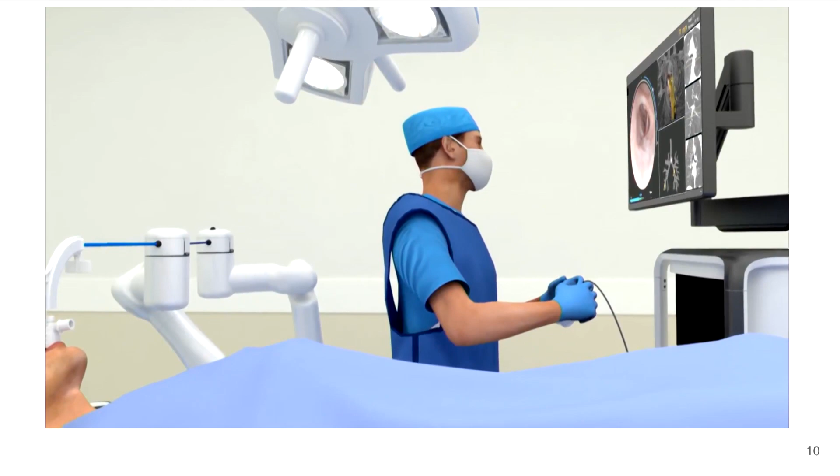We're here with Monarch, which is part of Ethicon and the Johnson & Johnson MedTech organization since 2019. Our product is the first and only multi-specialty flexible robotic platform that's cleared for use for both bronchoscopy and urology procedures. The platform integrates the latest advancements in endoscope innovation, instrumentation, controls, algorithms, and software, with the goal of enhancing physician capabilities and improving patient outcomes.

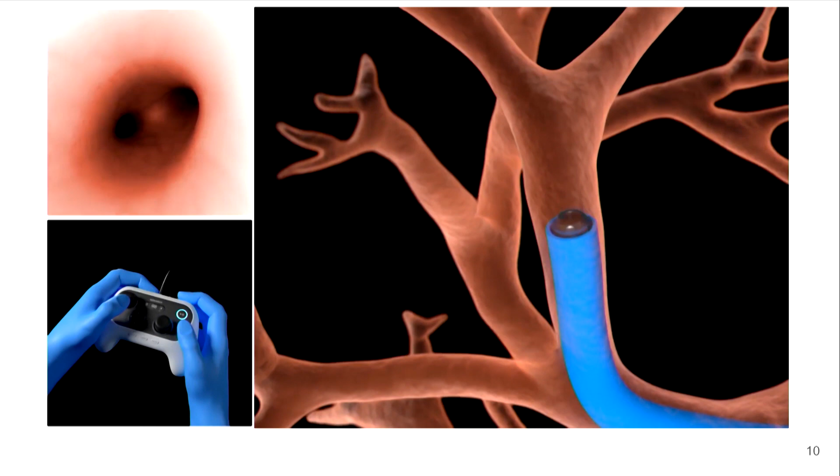To date, we've done more than 30,000 bronchoscopy procedures in the US, and last year we also received FDA clearance for our urology product, and we've been running clinical trials targeted at kidney stone management this year. So the goal is to extend the capabilities of the platform with an exciting pipeline of procedural innovation.

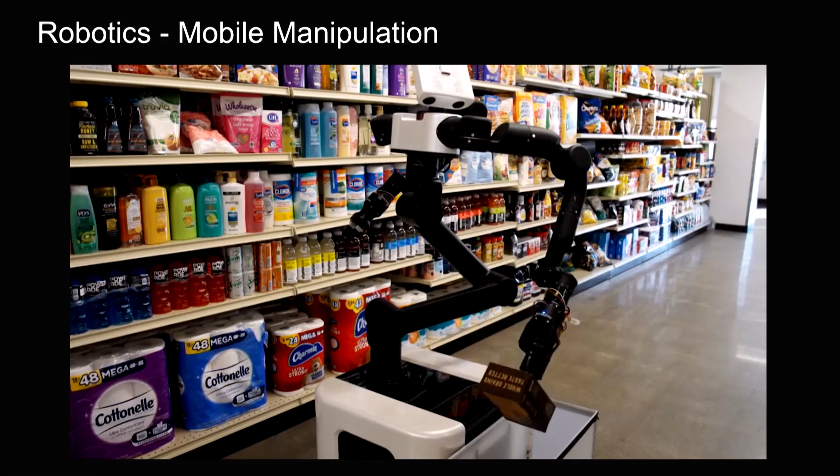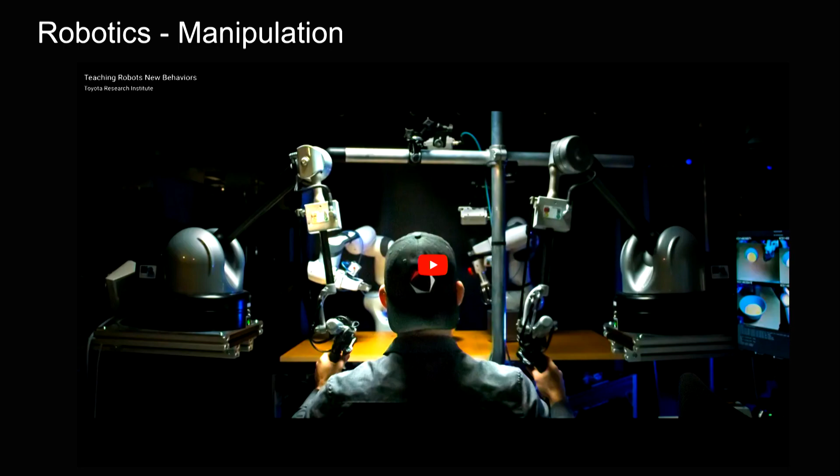and see how our capabilities enable these sorts of technologies. This is also transitioning into things like the factory as well, as we move toward some applications within Toyota. There's also a big manipulation effort in Boston, building lots of different low-level behaviors.

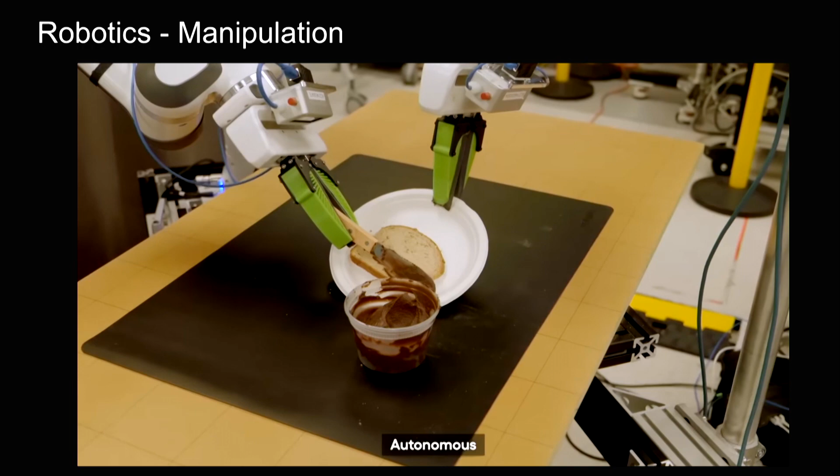We've actually seen a huge step change with some of the generative AI techniques, such as diffusion policy, and being able to train on 60, hundreds of different tasks. The promise of having large behavior models eventually is something that we're very interested in at Toyota, at TRI generally.

Beyond this, we actually have a large language model team to enable some of this downstream as well. We also do vision language models and a wide variety of principle-centric computer vision in the machine learning team.

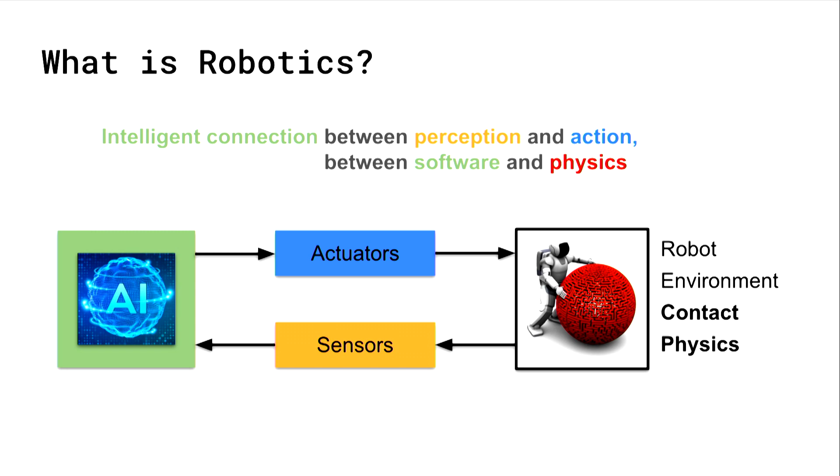Increasingly, all the sensor processing and control processing becomes more artificial intelligence and machine learning, and we try to build this into the system from the very beginning.

What's happening in the world of robotics? There's a couple of things which make things different. One thing is obviously generative AI, which we repeat again and again.

There's another thing which is increasingly important: building platforms that support all these different things. ROS was really one of the main platforms to get this going. Intrinsic tries to do something similar on a larger, more modern scale. The Open Robotics community, officially Open Source Robotics Corporation, is actually part of Intrinsic now, and we work together to make this work.

And then there's other cool things: a huge amount of compute power, TPUs becoming increasingly popular, and lots of different kinds of sensor modalities you can draw on. TPUs are kind of fun at Google.

Intrinsic is interesting because it gets into a large spectrum of applications, from basically more structured environments to increasingly more unstructured environments. We started a little bit conservative and try to get better.

We also have some fun interfaces. I can play this. You can see more about this, and this becomes increasingly more useful for research.

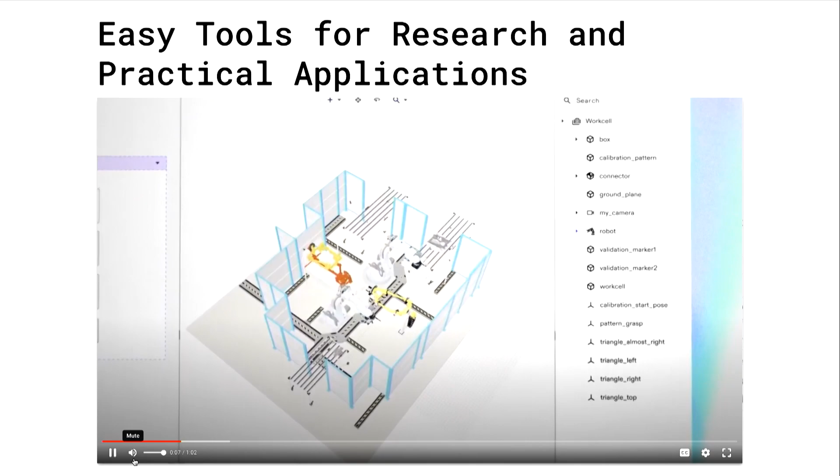That's pretty much it. You can find things on our webpage. We are always interested in collaborations and interns in the future. Thank you.

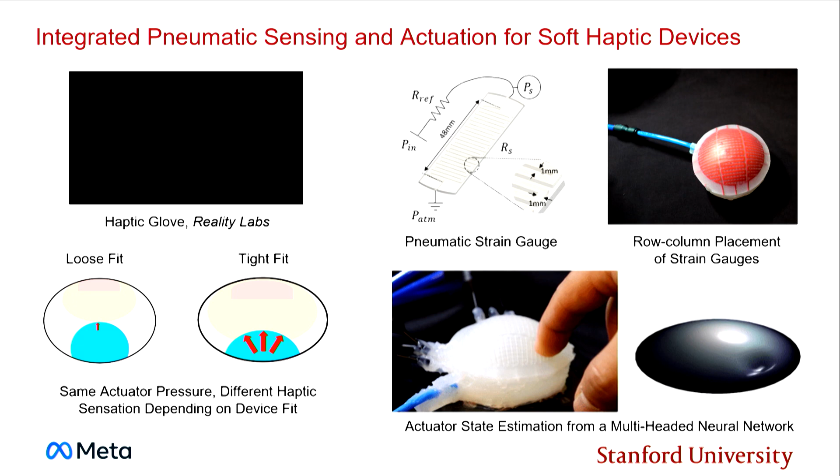One of the key problems for soft, pneumatic, wearable haptic devices is the difficulty of providing consistent haptic feedback due to variations in body shape and skin stiffness of users. Instead of internal pressure regulation, soft actuators should be controlled based on interaction force. We designed an integrated pneumatic sensor and actuator, a soft actuator capable of detecting contact force, contact location, and its overall shape. We do this by casting an array of pneumatic strain gauges on the surface of a soft actuator and estimating its states using a multi-headed neural network. For more information, please visit my poster.

Hi, my name is Morgan Masters, and the clock has started. Deep learning can accelerate field research, but struggles in novel deployments. This is because of a dependence on annotated training data, which is historically time-consuming and expensive to generate. Because of this, a lot of modern research gets stuck in the labeling bottleneck, where data cost precludes deep learning as a feasible tool.

In response, my team has built a tool called PinView, a field robotics system designed to help field research non-experts develop annotated image datasets for emergent research. We've been general in our design so that you could track disease on a farm field, inspect power lines, or census Arctic polar bears. Calibration is the primary challenge, and I'd love to talk about it at my poster.

Hi everyone, my name is Shuai Wu from Mechanical Engineering, Stanford University. Stroke is one of the leading causes of death in both the United States and worldwide. Considering the increasing number of aging people, this requires more experienced neurosurgeons, especially since these operations generally rely on navigation of a catheter in a very tortuous environment until you reach the target position.

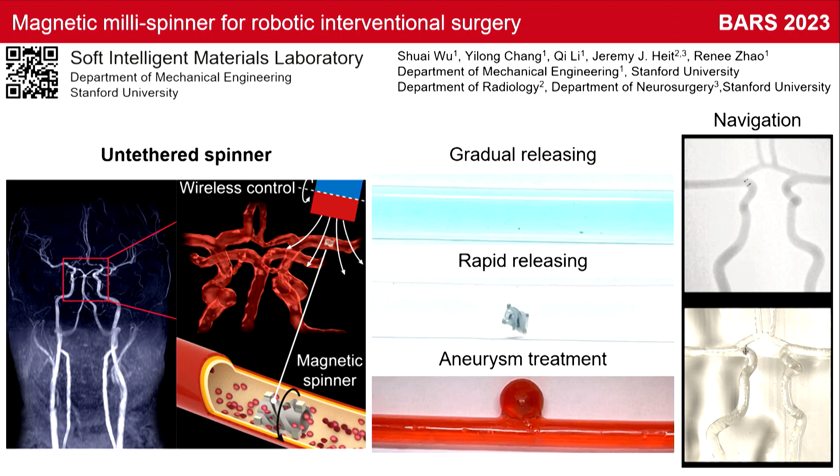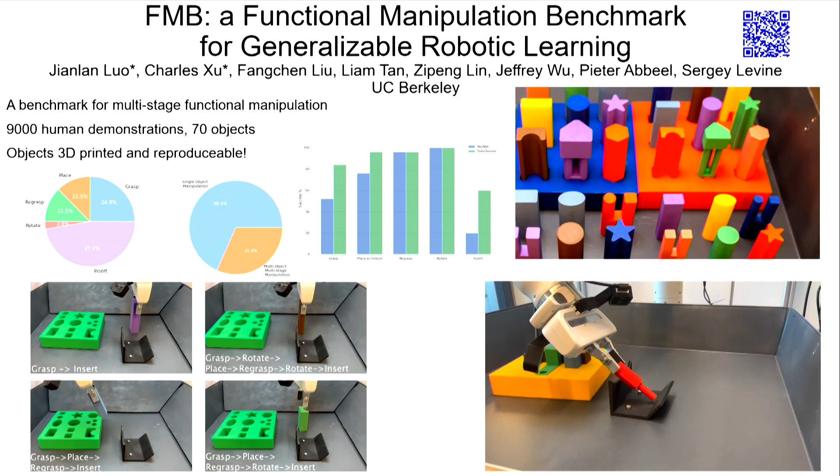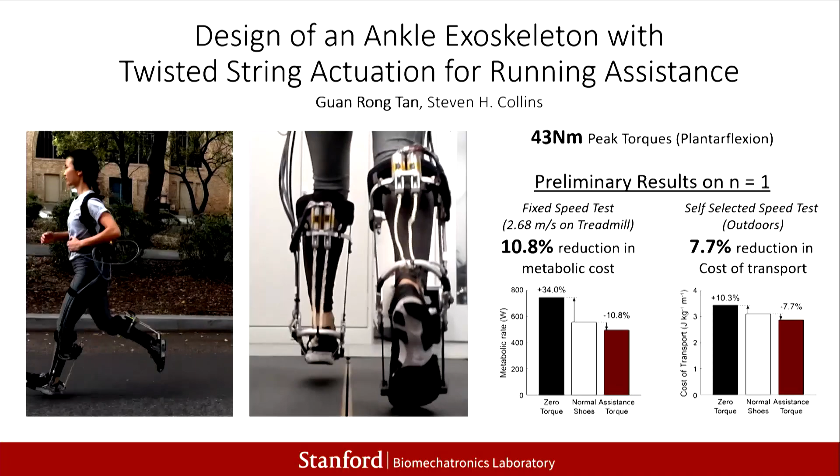We do that by applying plantar flexion torques at the ankle with twisted string actuators. You can see the twisted string actuators in slow-mo in the second video. Essentially what happens is that as the user's foot strikes the ground, the motors spin up the strings very quickly, causing them to twist and contract and apply a very large force on the heel lever.

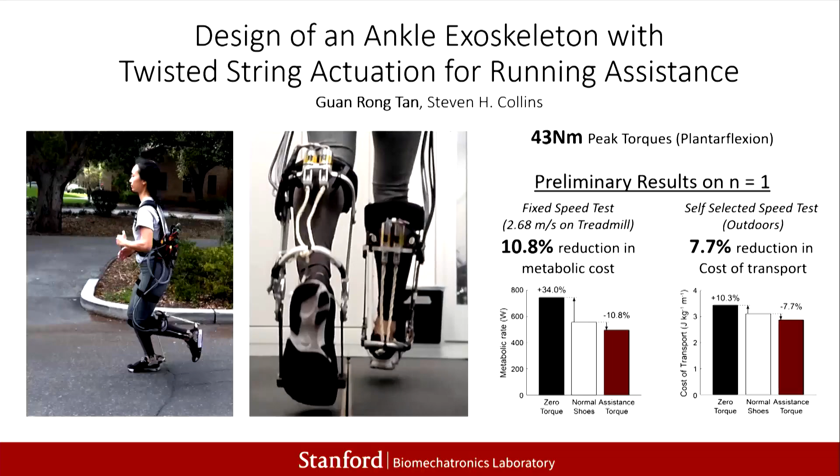It can apply up to 43 Newton meters of peak torque at the ankle. In preliminary tests on one subject, we managed to reduce the metabolic cost of running by about 10.8%. For outdoor tests at self-selected speeds, we managed to reduce the cost of transport by 7.7%.

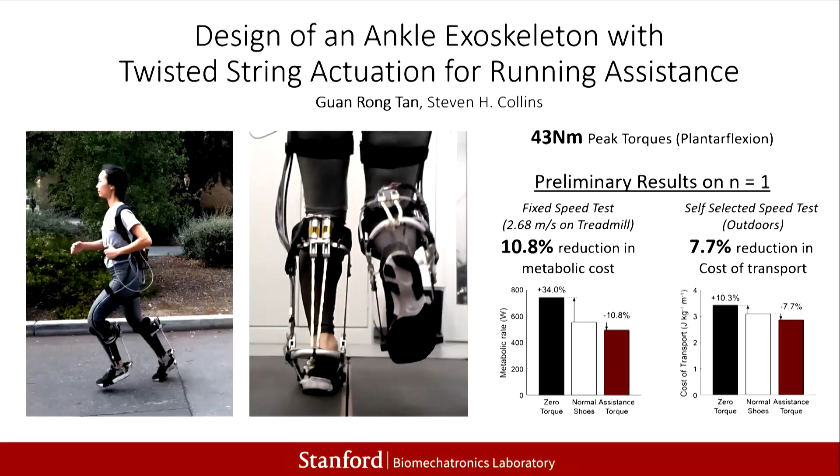Hello, my name is Jasmin Palmer from the Stanford Charm Lab, led by Allison Okamura.

Haptic devices designed for interacting with virtual environments typically occupy the hands and fingers to apply mechanical stimuli. However, these devices can make creating more immersive virtual environments either difficult, impractical, or impossible for certain virtual, augmented, or mixed reality scenarios. Haptic relocation from the fingertips to elsewhere on the body has been shown in prior work to improve task performance, enjoyment, and user acceptance compared to scenarios with no haptic feedback.

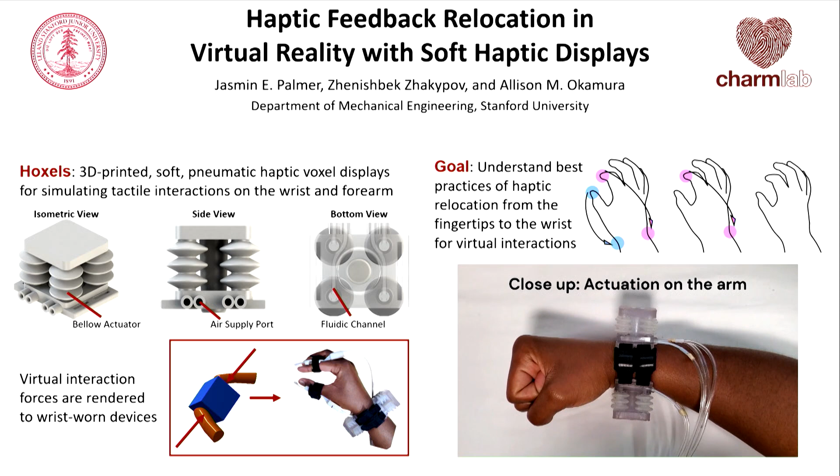Here we present Hoxels, 3D printed soft pneumatic haptic voxel displays for simulating tactile interactions on the wrist or forearm, in our goal to understand the best practices for haptic relocation from the fingertips to the wrist for virtual interactions.

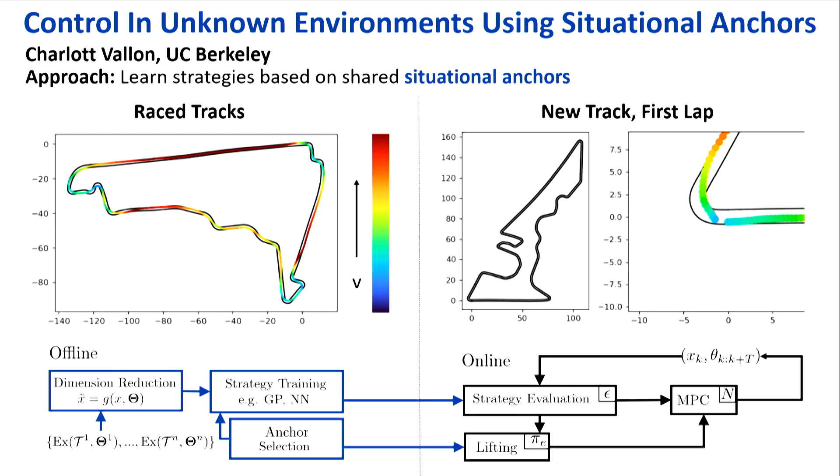We use stored trajectory data from previously solved tasks to learn functions that map a local situational anchor to a low-level target set that we can implement in an MPC. And I too have a poster. If you have any questions about how we implement this in a number of applications beyond racing, please stop by. Thank you.

Hello, two years ago we introduced the smart suction cup, featuring four internal chambers connected to pressure sensors, enabling us to measure its internal airflow. Today, we are taking it a step further.

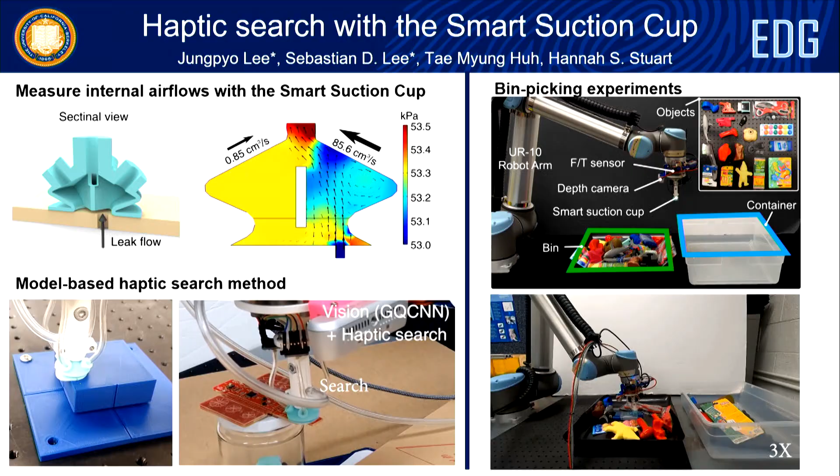We've developed a model-based haptic search for the smart suction cup, adjusting its pose using this internal airflow we measured to find a better grasp point. To put it to the test, we've conducted a bin picking experiment. From the result, we showed that our haptic search outperformed the vision-based algorithm that lacks this haptic feedback. So please come to my poster to see this little tiny but strong suction cup. Thank you.

Hi, I'm Xiang from UC Berkeley. We are working on contact-rich manipulation, where the robot manipulates other objects using external contact.

In order to do so, we need a feasible robot trajectory to set up the contact and a bunch of feasible gain parameters to establish a stable contact. However, it is difficult for us to learn something in simulation and directly deploy in the real world because of the sim-to-real gap. Our idea for solving this problem is that the simulation can capture the geometry really well, but the main difficulty is that the gain cannot be transferred.

So we are using a gain optimization module to enable the policy to apply to a diverse set of real-world tasks without any fine-tuning. Please stop by our poster for more details. Thank you.

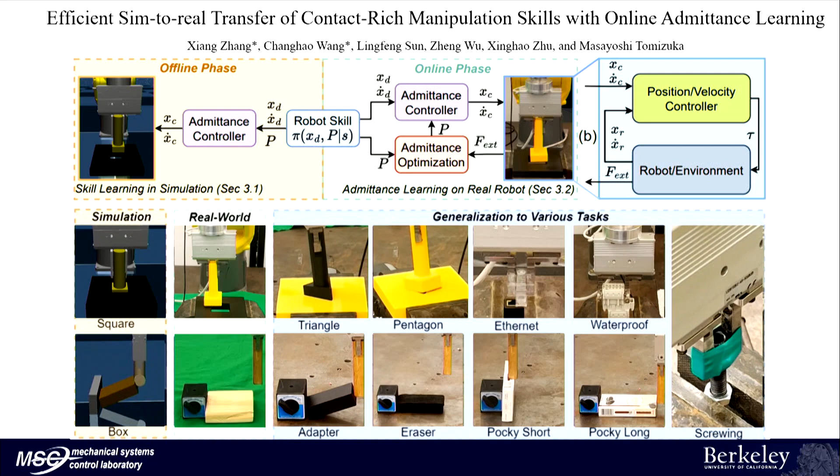Using no expert demonstrations, no reward engineering, and no manual language annotation, how can a robot scalably acquire language-conditioned skills? We propose scaling up and distilling down, a framework for language-guided robot skill acquisition, and it has two parts.

In the first part, we scale up language-labeled robot data. By giving language models access to sampling-based planners, we combine the flexibility of common sense with the efficiency of model-based planning. In the second part, we distill down all successful experiences into a single closed-loop 6-degree-of-freedom policy.

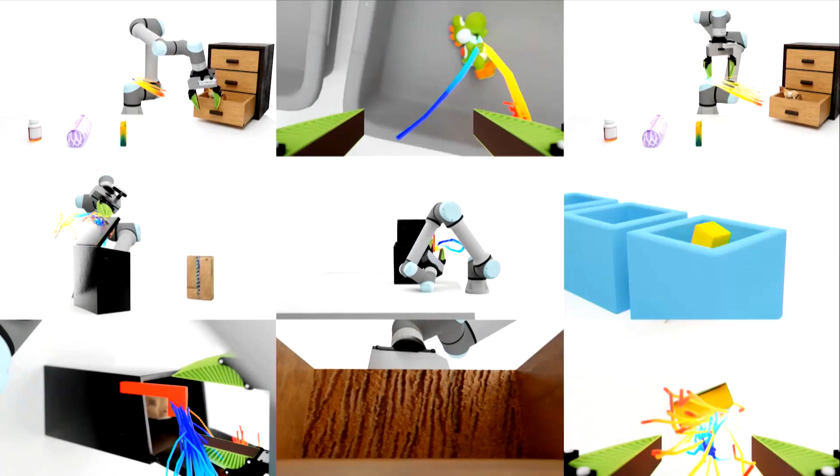The result is a policy that does not rely on simulation state and performs long-horizon, common-sense, tool-use, intuitive-physics, articulated 6-degree-of-freedom manipulation, generalizing across all geometry. You get the idea. To learn more, come find me, Huy, at the poster session. Thank you.

Hello, my name is Akshay, and I'm from the Hybrid Robotics group at Berkeley. Our work focuses on using control barrier functions for safety between convex sets. The motivation comes from the fact that over-approximating convex sets by spheres or ellipsoids can result in deadlock during control.

Our method uses derivatives and Hessians, which can be directly used in a CBF formulation. We find that for general convex sets, safety can be guaranteed at very little additional cost compared to spheres or ellipsoids. If you'd like to know more about our work, please come by my poster. Thank you.

Hi everyone, let me present to you M3L, a representation learning architecture based on masked encoding that fuses both visual and tactile data into the same multimodal representation space, and uses these representations for reinforcement learning and manipulation.

We train our architecture on various tasks and evaluate it on variations of the same tasks. What we found is that policies relying on both vision and touch generalize much better than those relying on vision alone. More interestingly, even training just a representation encoder with vision and touch also benefits policies that are then deployed at test time using vision alone.

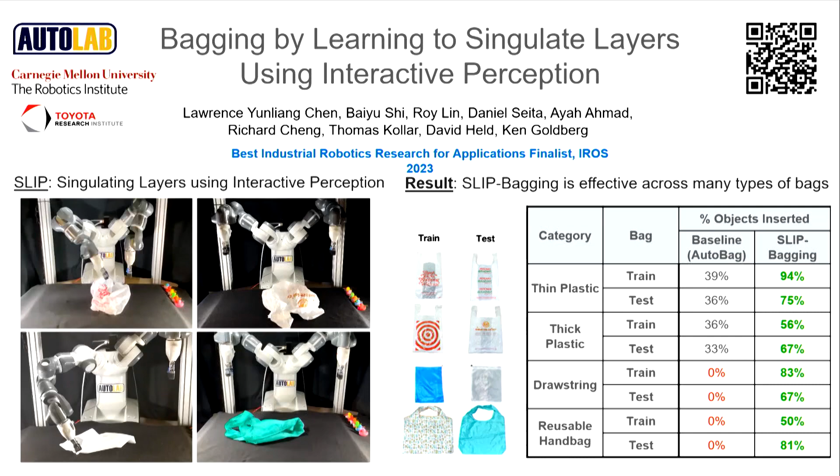Our key insight is that while it is very challenging for the robot to grasp a single layer of the bag, it can use interactive perception to help it adjust its grasp. Surprisingly, we found this strategy to be very effective across a variety of bags, significantly outperforming a prior algorithm. Additionally, we also find this to be very effective for singulating layers of fabrics and garments.

Please stop by our poster to find out more. Thank you.

Hi everyone, I'm Wingsum. I work with Professor Sean Follmer. Our group makes a lot of these shape-changing displays for things like haptic interaction, but these shape displays are often composed of a bunch of rigid bodies, which makes it really challenging to create smooth, curved surfaces.

To address that, we made this curved line display, which is based around the bending of a flexible rod. My collaborator, Sophia, modeled this system using the discrete elastic rods formulation, and using that model, we were able to make actuation instructions that take into account the system's multi-stability to create a really wide variety of shapes. So I also have a poster, please come talk to us.

Hi all, I'm Jerome Novak. You heard Sebastian Thrun say that it's difficult to deploy hardware at scale. That's one of the things we try to do at Prakash Lab, to automatically diagnose malaria in the field.

And what if, as a roboticist, you had to do some of this without access to electronics or electricity? Well, today I'm presenting Inkwell, a small open source device that automates whole blood sample preparation for malaria microscopy. It turns a single drop of blood into 8 million red blood cells neatly arranged in a plane, as you can see in the video.